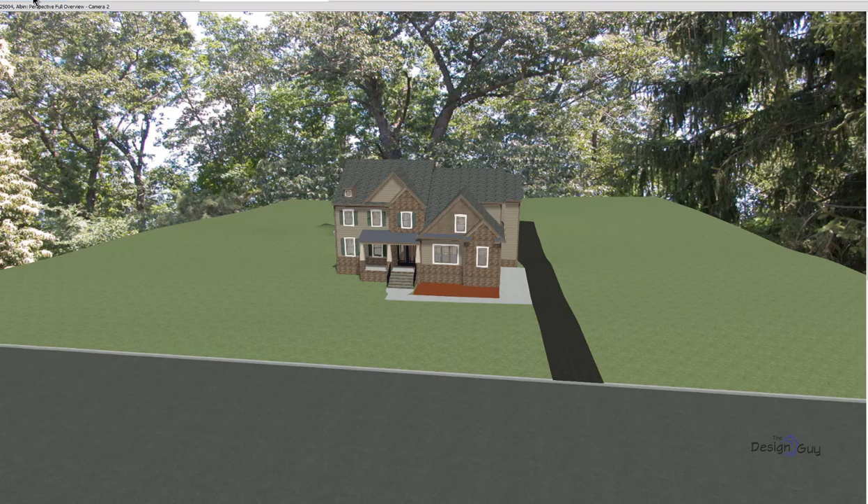Marcus, Christina, I am going to give you an update on the elevations. Main thing I'm looking at here was the grading. So when I come in here and we start looking at this, what I did is I laid your house out onto the plat. So this is what we had from the surveyor.

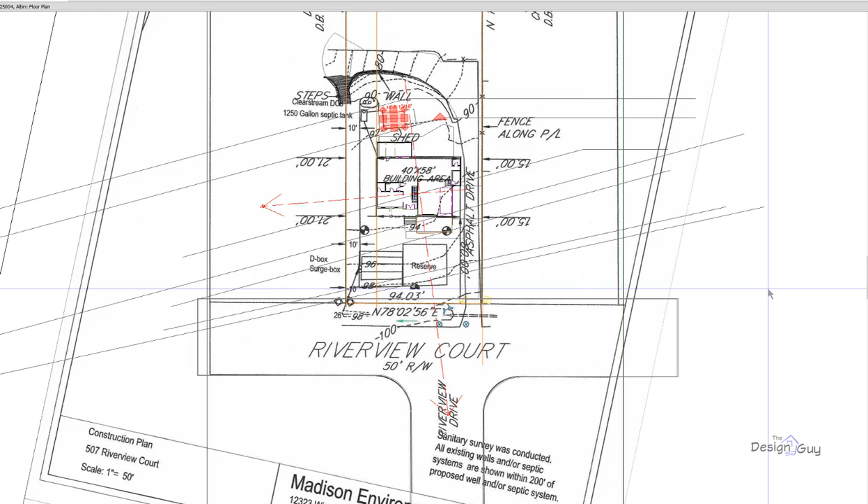What I've done is gone in and put the roads in, put the driveways in, put that little road beside that house in, put a shed in the back. Don't know that that's the style that you have, just trying to give us some semblance of what's going on. We've got the deck on the back. So I'm going to flip back over to the camera.

And grading wise, what I was looking at is out at the front at the road, they were calling that as being 98 feet as an elevation height. And then as we get back in farther, they were calling that to be 96-foot elevation height. And then closer back to the house, they were calling that as 94-foot elevation height.

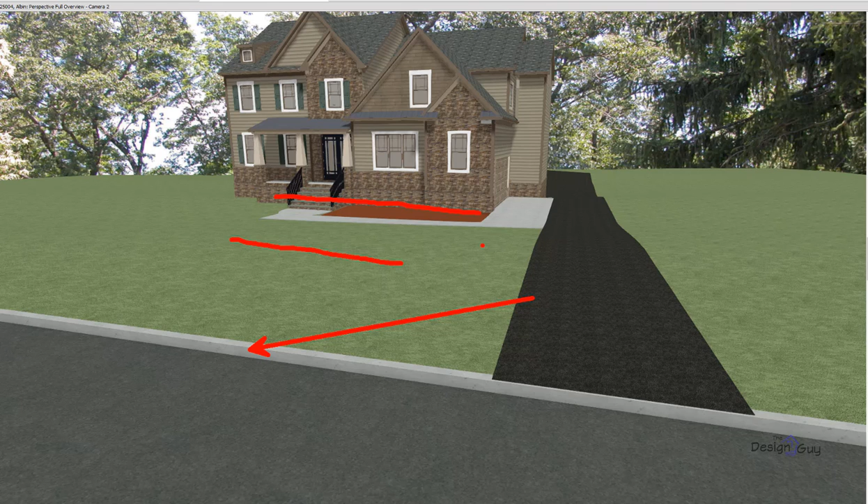Again, let me go back in and look here. This is what I was talking about. 98 out by the road, which would be here also. Then 96 as we get in a little bit farther, and then 94 back towards the house. That's what this line is here coming through, is showing that 94 feet. This would be the 96 feet.

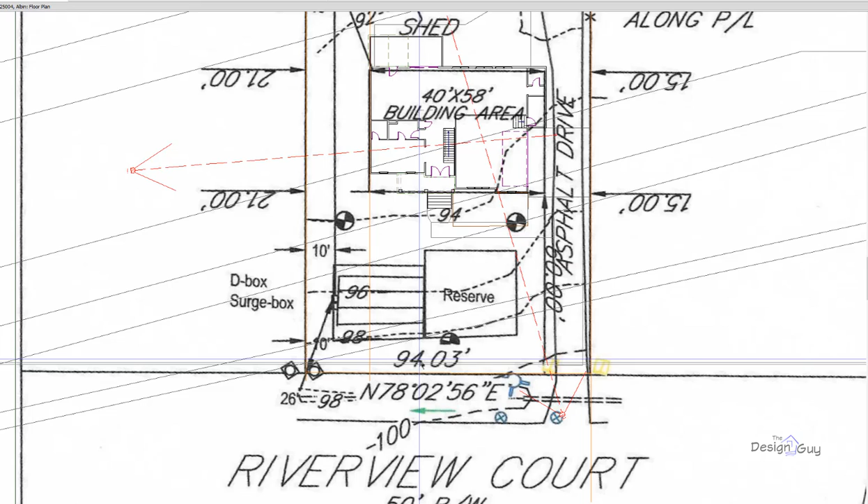And what we had talked about was doing some filling. So essentially what I'm looking at doing is where you were digging this basement out, is bringing fill dirt into the front and basically bringing this up to somewhere between 95 to 96 foot, right in that area, which at that point would give us the steps that I am showing here.

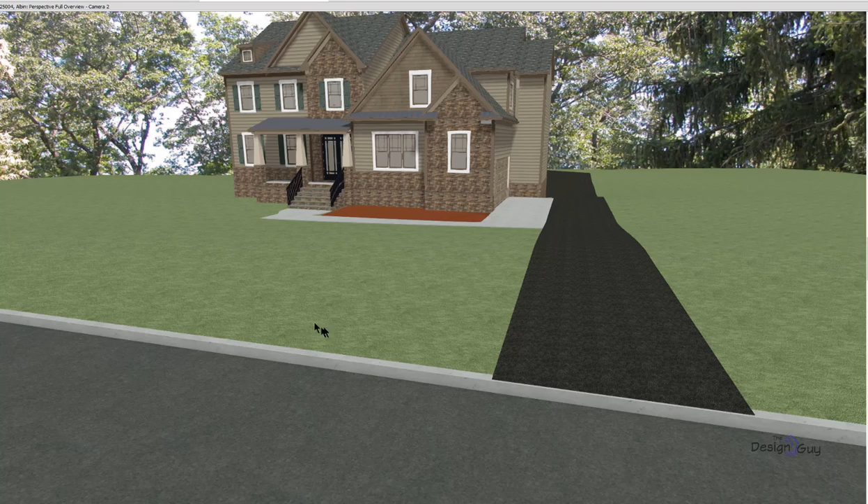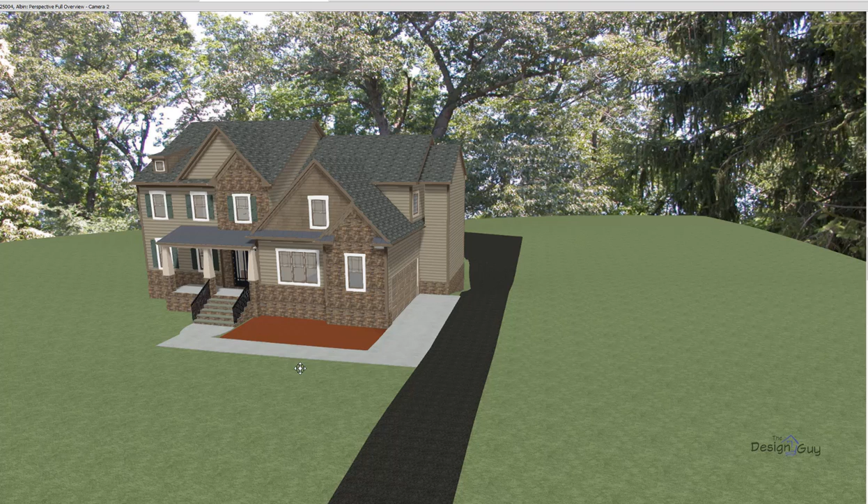So as we zoom on into that, these grades are going to be pretty close based on what you've given me, as long as they can get that fill out of that basement and brought around to the front. So I bring that out to the side. Again, this road is laid in straight over top of the survey, so that's going to be pretty close for where the road is. We do end up picking up some extra height here in the front, just from where we were trying to bring it up out of the ground to keep from having to bury it in the back any more than we need to.

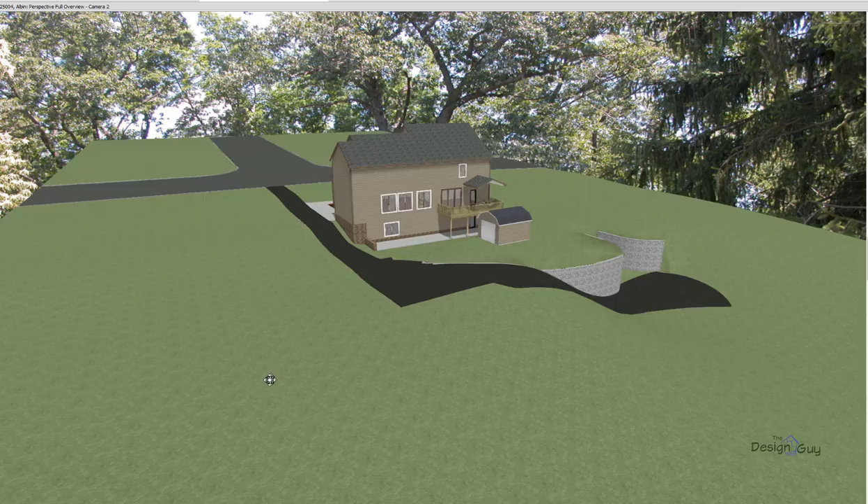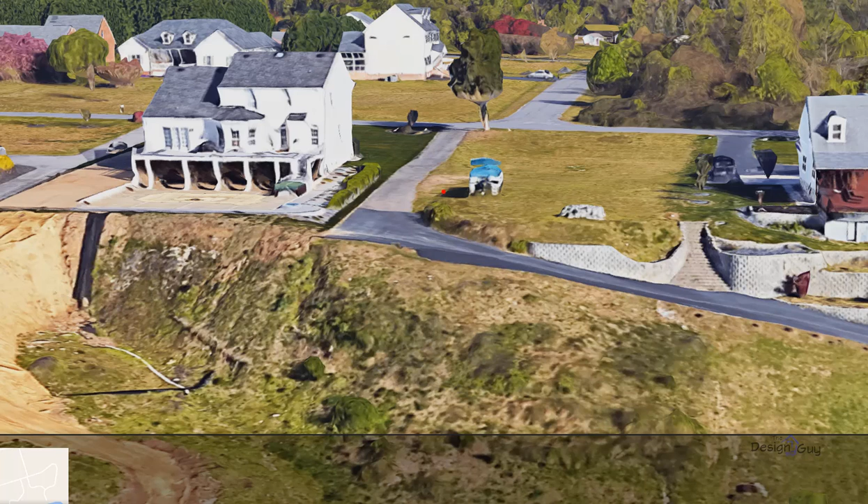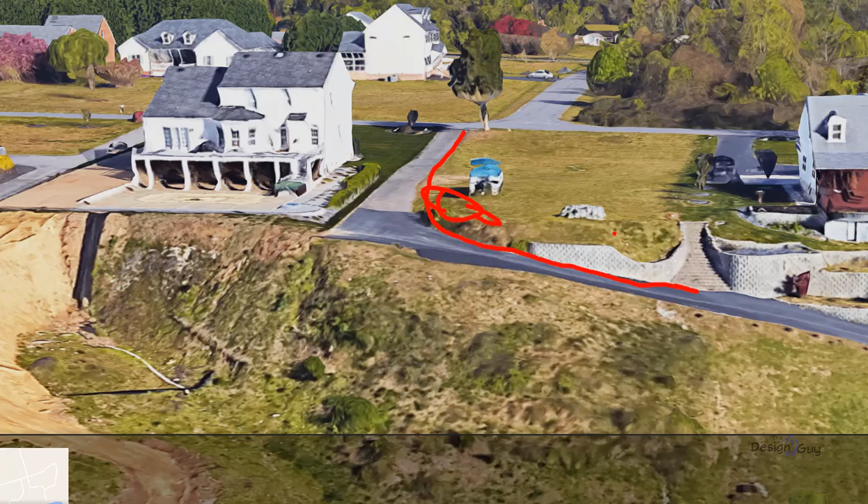Now, the grading for that road on the back, I'm not going to say is exact there. I'm just trying to resemble what we're looking at. And as I was looking at the 3D of this in Google Earth, it really wasn't that much different. So I drag this over. We'll take a look at that real quick. Because that's where you got those steps coming down. You get the mound of dirt that you were talking about through here. So this road is what I've got laid in. And height wise, once we get past that wall, it doesn't really matter what I have. So back to here.

Bring this back around. I have not laid in the actual structure for the screen porch, but what I was looking at doing was an A roof over top of that screen porch, and then of course we'd have the columns in from there as well. Gable wall.

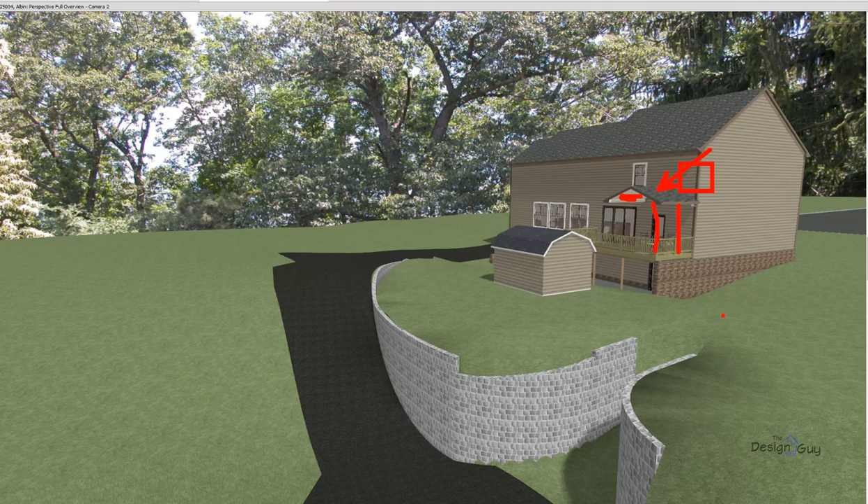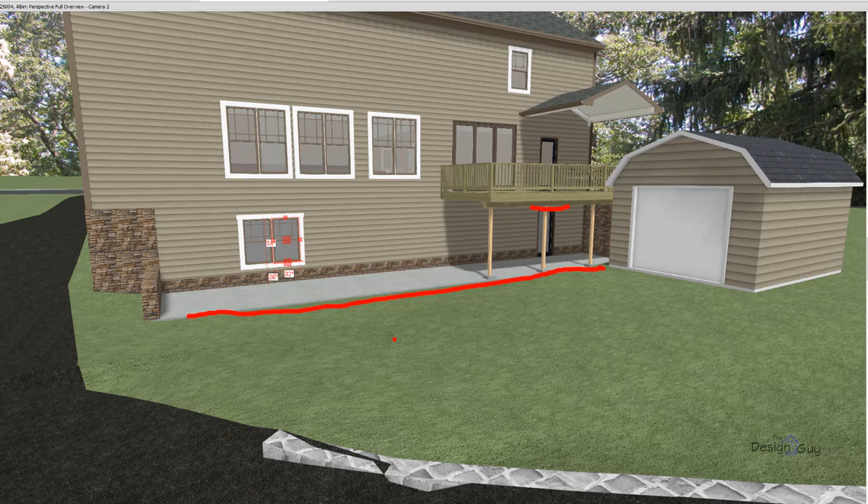Then as we zoom into the back here, what I'm looking at is they've cut the dirt out. This window is 80 inches off the floor, which should be the same height as the door. So that'd be the same height as what we are here. And then coming in and putting concrete in for at least a portion, if not all the way down. I did bring this retaining wall back off of the corner. And I was looking at going ahead and running the stone up, keeping it where that foundation was on the side.

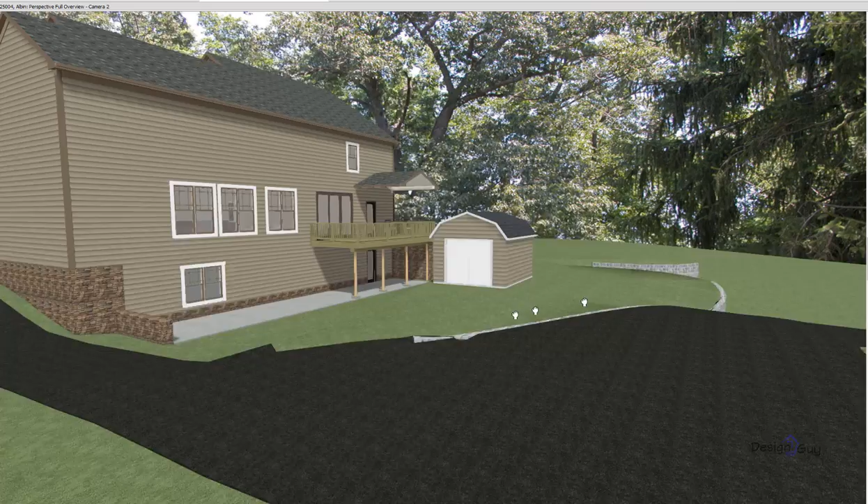Let's zoom back out here. Just trying to keep the stone up high as it comes around, and we'll have it capped, and then it would turn to come down that back and then drop once we hit the retaining wall. We can discuss that some more.

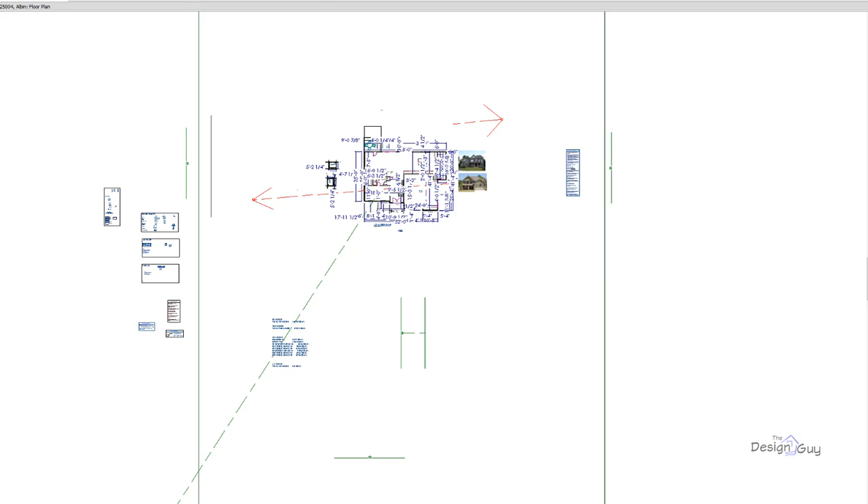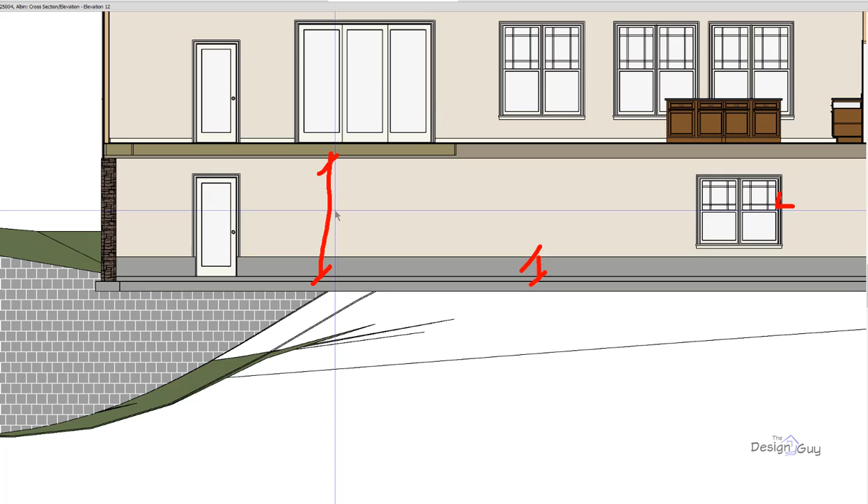And then if we go to that floor plan, I'm going to jump to that basement area, and when we go in here and do a rear view of that wall, the slab outside is going to be about 4 inches lower than what the slab is on the inside. I've set this up to where we are 8 foot inside height. This wall is going to be about 16 inches off the floor. This window is a 4'6" window, so that's about where we would be off the floor there.

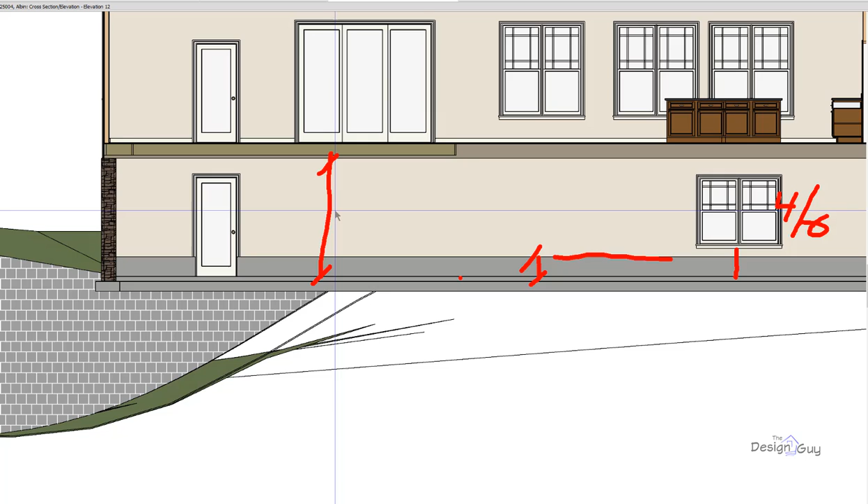Having the masonry wall up to a certain height keeps you from getting splashback. This wall can go back closer to the ground, but typically you're going to need to have at least 8 inches anyway. So at that point, I'm just looking and saying maybe we should just keep the 16, would be my suggestion. Then back over to the elevations.

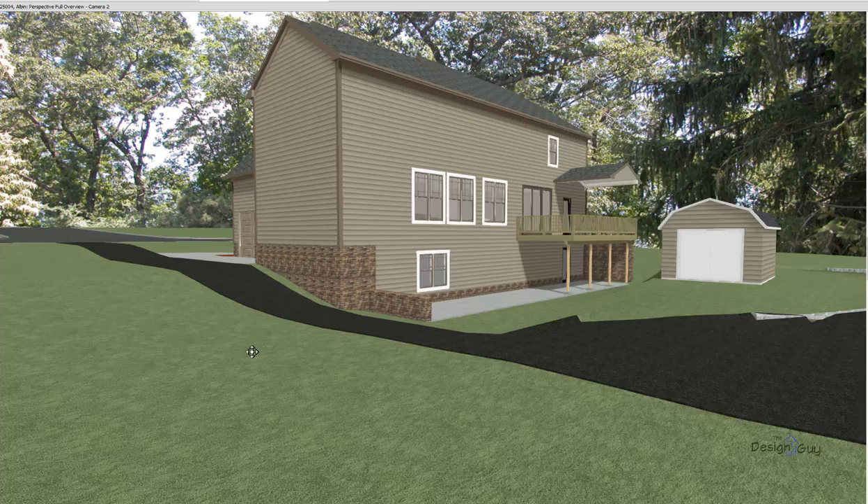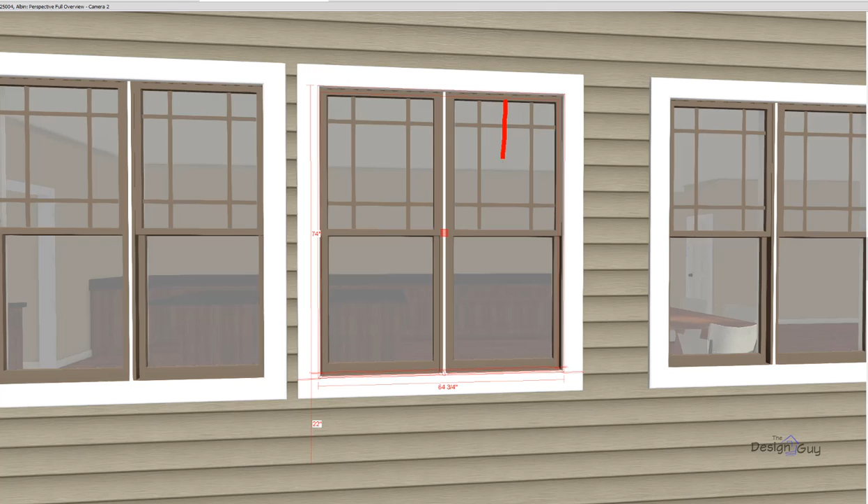One thing that I would like to discuss with you is the grill patterns for these windows. Let's see what you're looking to run for those. You've given me pictures of a few different things, so just trying to get an idea of what it is that you like. Whether you want to go with the prairie style grill, or if you want to go with the 4-piece, just the 2/2 grill only in the top. So that's one you can get back with me and let me know. I did put the window into the bedroom at the end just so we could get an idea of what was going on with that.